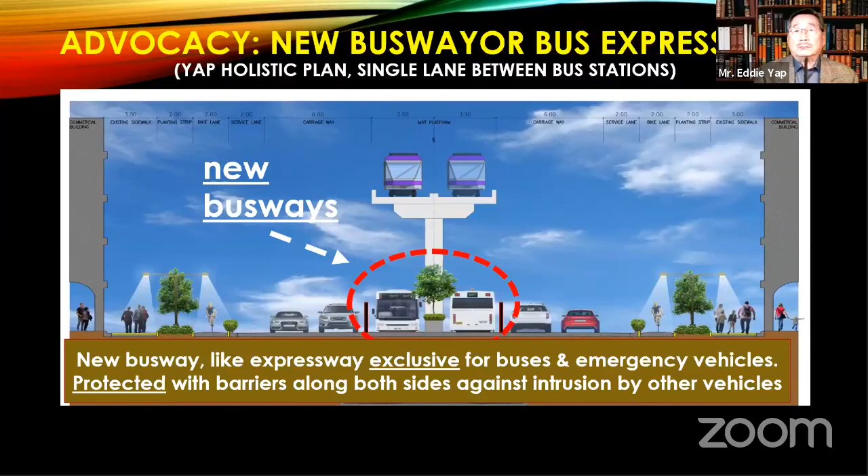Advocacy requires persistent efforts; we do not expect immediate results. On May 10, 2020, I wrote an article, Don't Waste a Crisis, saying that the coming transition period to GCQ with subnormal passenger demand would be a more manageable environment.

That environment ought to be productively used to introduce and pilot test a new bus transportation system. Don't waste a crisis. Following that, Secretary Tugade organized a conference with his road team. Aside from me presenting busway and bus service reform, Attorney Martin Delgra III, LTFRB chairman, presented his comprehensive bus transportation reforms. Present were Secretary Tugade, the road sector team members headed by ASEC Mark Stephen Pastor, and others. After the meeting, which took all of 3 hours, Secretary Tugade said our ideas are aligned, status quo ante is not acceptable, let's do it.

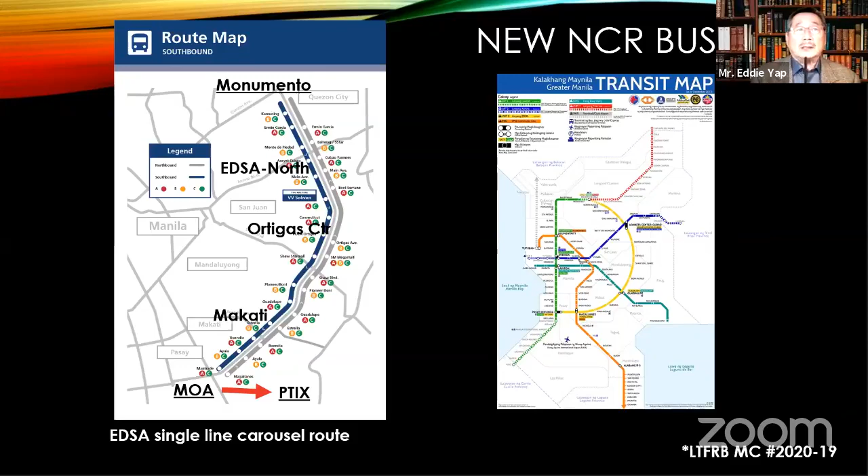Now I would like to share with the MAP, an organization of management practitioners, how these reforms were approached, and the strategies employed that accounted for the quick, inexpensive, and disruption-free implementation. This included complete staff work for bus transport route and service reforms. From the outset, I had personal knowledge that the staff of the DOTR was working on this.

Best practices in bus service employed were the new carousel line and the feeder system. An inclusive process was employed wherein existing bus operators were invited to participate in the new routes. Existing resources were utilized, with the rolling stock of bus operators minimizing capital expenditures. MRT3 facilities were utilized, including the bridges and emergency stairs, as access to the bus station platform.

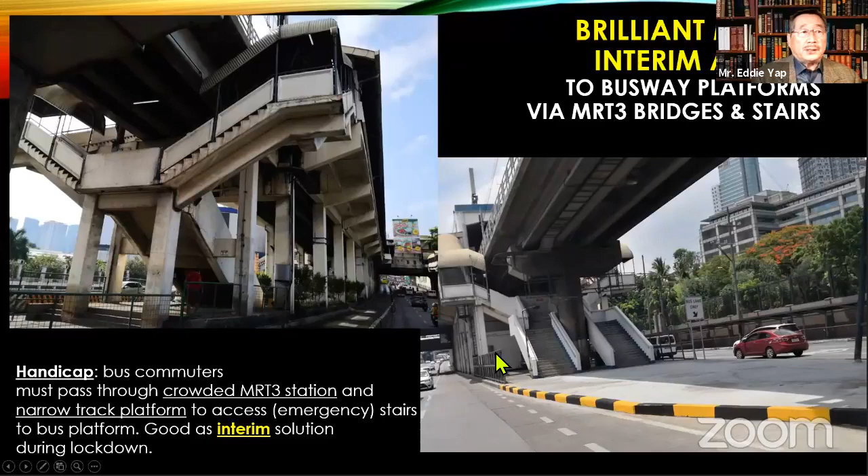It was interagency teamwork that got the busway going in record time, consisting of the DOTR, LTFRB, IAC for the bus management, MMDA, and DPWH. Busway sections were completed in record time: the first section was completed within 2 weeks, from EDSA north to Guadalupe. The second section within 6 months, from Monumento to North EDSA, Guadalupe to Estrella, Makati. This happened despite the lockdown and supply chain disruption. When the new MMDA chairman, Benhur Abalos, took over, he immediately prioritized new overpasses and U-turn slots at the north sector of EDSA to eliminate traffic conflict between buses and other vehicles.

Now let me show you how the busway worked. You can see that commuters are benefiting from faster travel. The busway is like a railroad, like the MRT3 beside it, unaffected by vehicular traffic. This accounts for the efficiency of the busway: it is dedicated and protected against interference. I think you got the idea, so let me continue.

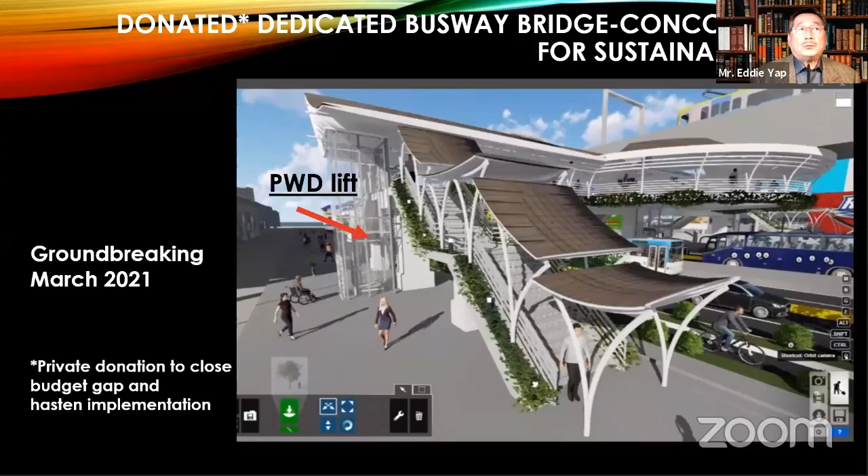Now, because of the budget constraints, we resorted to donations from the private sector to build some of the access bridges with concourses. So this is a visualization of what is being now built along EDSA. The groundbreaking was on March 2021.

Now, when I said authority fragmentation, there are two agencies with diverse mandates, and this presents a catch-22 situation. DOTR is responsible for public transportation and needs additional road lanes for a high-capacity busway and stations to be developed. Currently, it is allotted 1 out of 5 lanes per direction, 2 out of 10 total lanes. MMDA, on the other hand, is responsible for private vehicle traffic management, and it needs road space for private vehicles to flow.

This was before the term of the current chairman. 4 out of 5 lanes were allotted per direction, meaning 8 out of 10 total lanes.

So who should get priority allocation of road space? We believe that the arbiter is the National Transport Policy of NEDA, approved by the President himself in 2017. Section 12.9 says inclusive and people-oriented mobility. Inclusive mobility and accessibility shall be achieved through the prioritization of people mobility over vehicle mobility. In line with global best practices, public transport and shared transport modes will have priority in the use of public assets, including roads of all kinds.

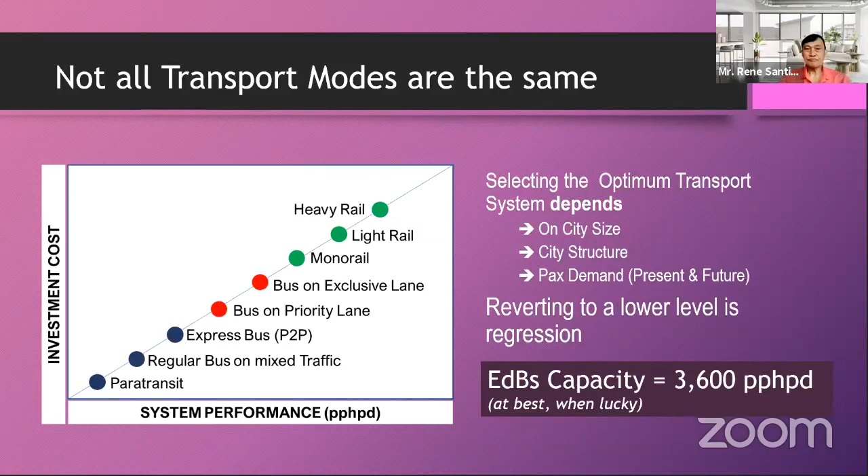What is the evidence now on the ground about actual operations? This is from a paper of Dr. Noriel Tiglao of the National College of Public Administration and Governance of University of the Philippines, published September 2021 and presented at the EASTS Conference in Tokyo. The average headway northbound is 4.1 and the average headway southbound is 2.2. So you have an average of 2 minutes headway, which is equivalent to 30 buses per hour, or 1,800 passengers per hour per direction if it is packed with 60 passengers.

This is corroborated by my own personal dash camera. Whenever my car drives around and passes EDSA, it records the situation on the busway. And I counted 9 buses over 30 minutes, which was about 3.3 minutes.

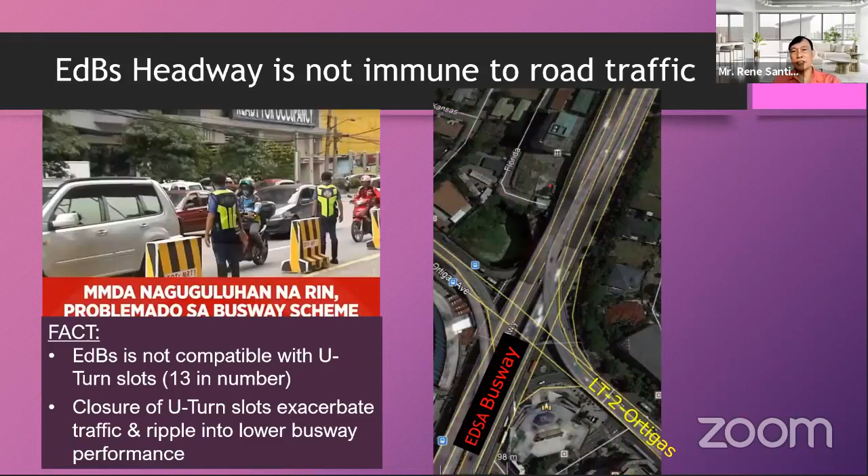The capacity is, of course, constrained by the road traffic, and that is why MMDA got problematic with the busway scheme, because it is being asked to close all 13 U-turn slots on EDSA. The U-turn slots are, of course, incompatible with the busway. But if you close all of them, you will exacerbate traffic, and this will ripple back into the busway being caught in the gridlock. This is an illustration of the situation, for example, on Ortigas, which has 2 elevated left turn ramps going to the west and to the east. Anytime your busway passes there, it will run into conflict with the busway. And you cannot close that intersection, otherwise the entire traffic in Metro Manila will grind to a halt.

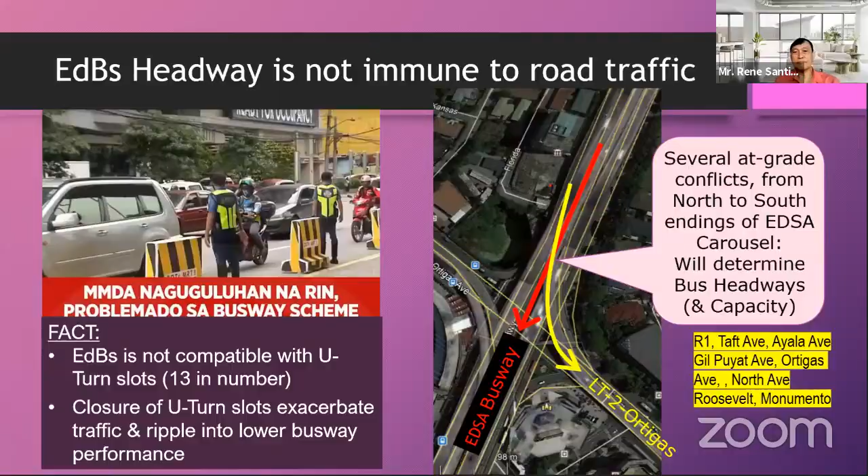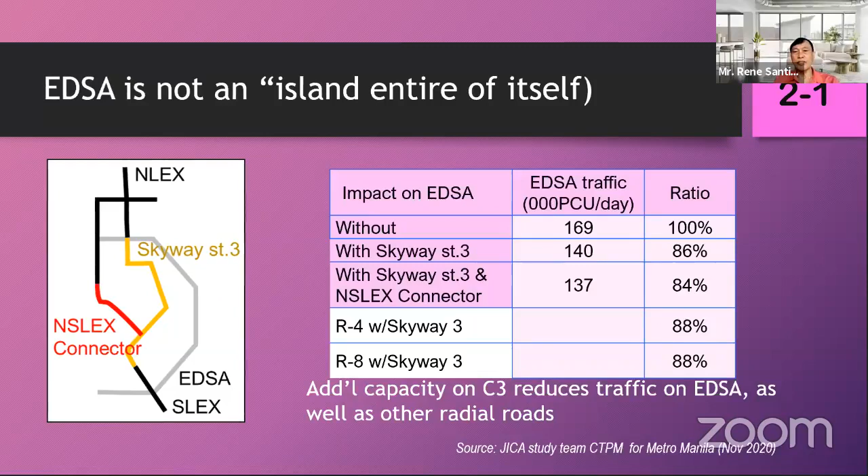The bus network is shown here: the situation before COVID, and then the situation if you fully implement the LTFRB route scheme, which is EDSA trunk-centric.

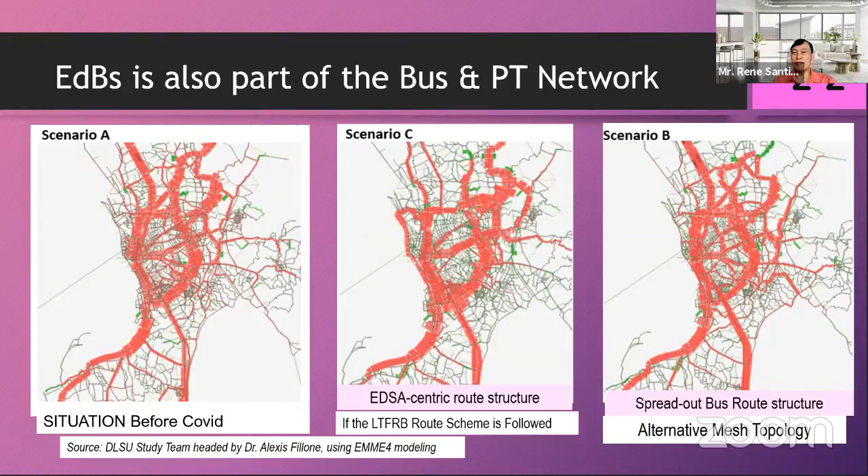This was modeled by Professor Alexis Fillone of De La Salle University using EMME software with grant research funding from the Department of Science and Technology. In fact, he has a better scenario that if you change the route structure, you can further reduce traffic on EDSA by utilizing other routes.

And this is the route structure of the LTFRB approved restructuring. The restructuring, by the way, was already initiated way back in 2015, recognizing that we need to change or redesign the route structure. In this case, from more than 90 routes and 10,000 buses in Metro Manila, LTFRB plans to reduce that to 31 routes and 4,600 buses.

That is, on EDSA, you will bring down the number of buses from 3,500 to 550 buses. The initial deployment of the EDSA busway is only 22.5 kilometers, and the final EDSA carousel is 28.1 kilometers. The EDSA carousel is to end on PITX, not on MOA.

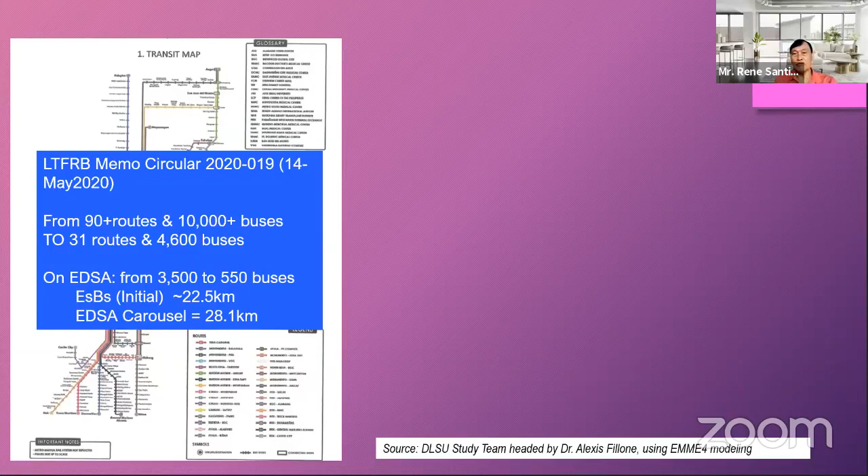This again is the simulation run by the De La Salle team of Dr. Fillone, that initially when they started, allowing only buses on EDSA, that is how the demand would look like. And on the right, as you add more buses into the network, it changes the demand on EDSA.

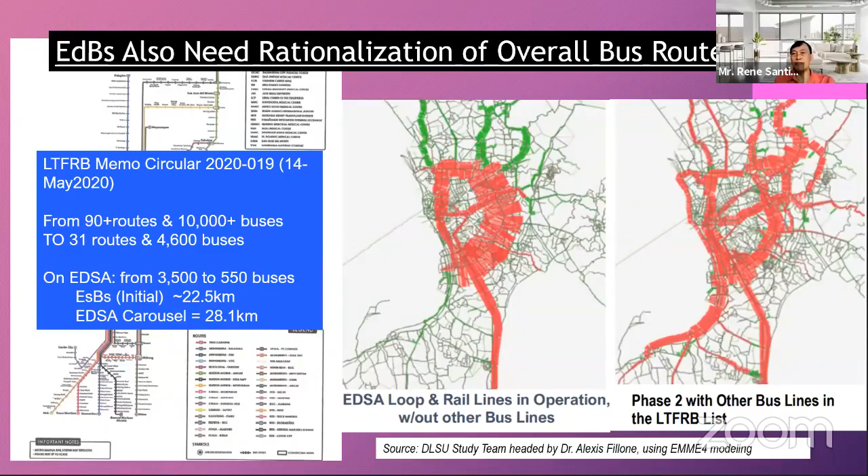Let me go to the third point: sustainability and viability beyond 2020. And let me present already ahead what I'm saying: the current setup will hit several brick walls in a post-pandemic scenario.

That is to answer, can the busway scale up to the BRT envisaged under the BBB program? Under the BBB, there is a central corridor BRT, EDSA BRT, on a study conducted by ITDP, evaluated by ADB in 2015. ADB was supposed to finance the project, but they turned cold feet.

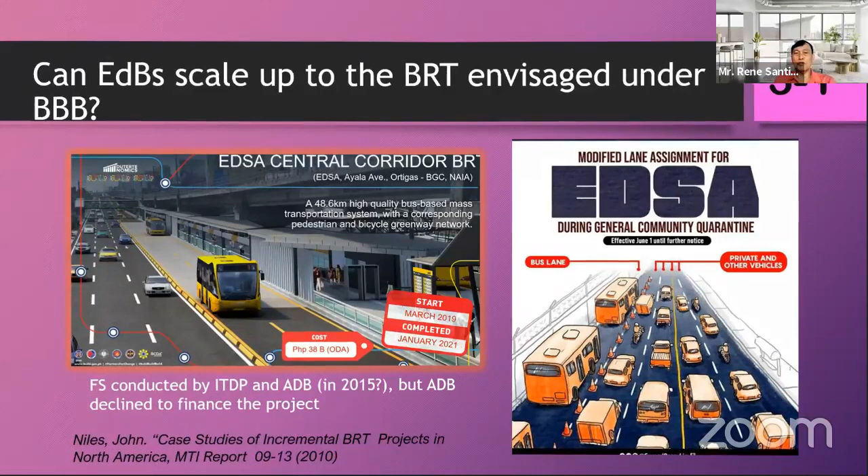This will cost something like 38 billion pesos. That is far from what you have now, the so-called EDSA busway. How do you get the two? To fix the busway and improve it towards a BRT, you need to address 7 factors.

Question: how much will it cost you? If you follow the ITDP, that is $750 million. And for what additional capacity will you get return for $750 million? Maybe 5,400.

But there are insurmountable roadblocks in some of the 7 aspects. On the other hand, your other and cheaper alternative, because you already have MRT3 on EDSA, you just expand it for less than $50 million because you have 48 idle Dalian LRVs procured in 2015. If you can deploy them, you will add an additional 8,900 capacity on EDSA.

As currently constituted, by using the MRT3 stations, the busway has positioned itself in direct competition with MRT3, meaning when you have the same loading and unloading points, since you expand MRT3, there will be no more space for your bus passengers. And why will they go down and up when they are going to the same destination?

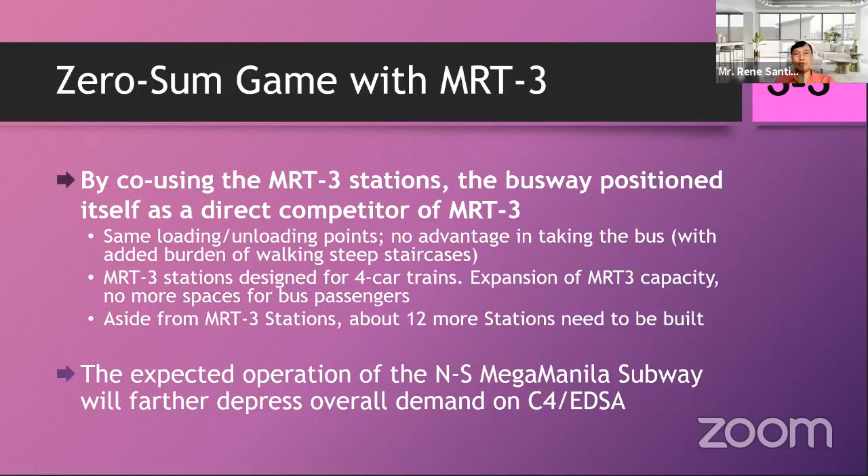The busway has so far survived on the basis of the service contracting scheme, the favorite reform proposal of Dr. Robert Siy It is a lifeline to the busway. It was used to disburse ayuda to drivers under Bayanihan 1 and 2, but it became actually an ayuda more to favored operators, at least if they get paid.

It offered free rides to commuters on the busway. I will say that the service contracting scheme is a bad policy akin to reverse privatization. Government becomes the transit operator for which it has no capacity.

The selection of contractors will be susceptible to corruption, and it blurs the separation of regulator from operator. At the same time, if you push this continuously and expand it, it becomes a financial time bomb that the country can ill afford. Why on Metro Manila alone?

It will require 169 billion pesos a year in 2021 prices, of which 18 billion will be for 5,500 or 4,600 buses. And once you have that under contract, it is too tempting for politicians not to dip their clean fingers on.

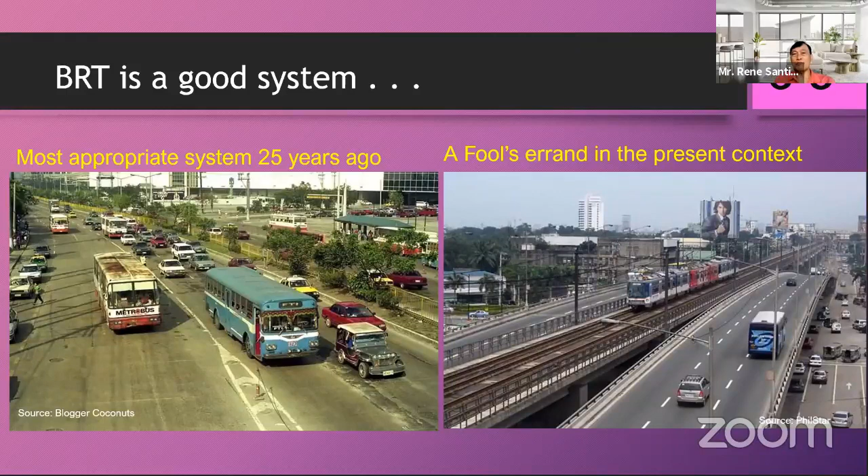As a summary of my third point, BRT is a good system, I agree. It is the most appropriate system 25 years ago when EDSA looked like this. But EDSA looks like this now. So if you continuously throw money into it, it will be a fool's errand under the present condition.

Let me end by saying the good things about the EDSA bus. It has some success factors, some obvious benefits that people now say are good.

The good part of the busway—like in Anderson's fable, I tried very hard to see the majestic robes of the busway so as not to be called a fool. After all, many in MAP, or mostly in MAP, have declared it a success. I've seen how beautiful its robe is.

And this is what I see, and what many of you see: before, the buses were disorderly; now they're confined to one lane, imprisoned by barriers. So if you were to conduct a survey among MAP members, the most likely answer would be 'we love the new EDSA.' It looks orderly. But there are unintended consequences, perhaps.

The LTFRB's restructuring plan reduces the total bus supply in Metro Manila from 10,000 to something like 4,600. On EDSA, from 3,500 to 550. Your busway, at best, when you correct it, can only achieve less than 3,600 passengers per hour per direction. So in effect, you are reducing EDSA from its erstwhile 8,000 plus capacity to about a third.

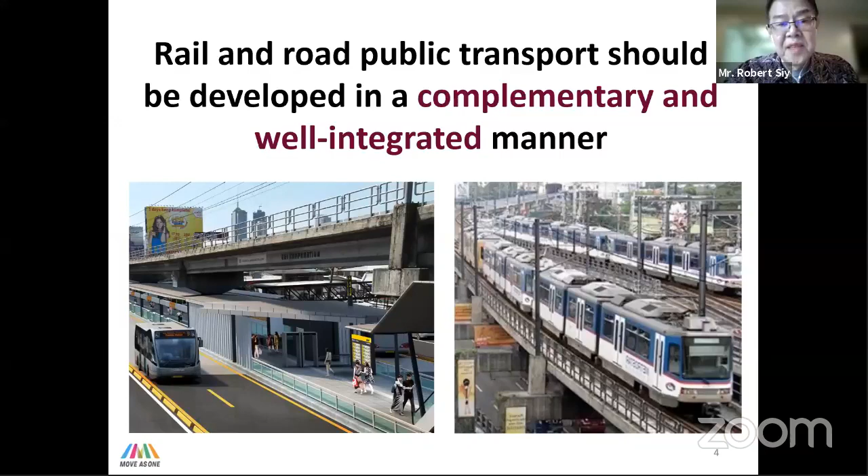And what does this mean? Maybe I can talk a little bit about what this means in terms of improving bus services. Let me go back one step. Let's see if I can... just a second. I think I skipped my one slide. Let me try to go back. Probably at the bottom left there's a left arrow you can click.

I got it. So what I wanted to explain is what makes a high quality bus service. Rene earlier mentioned many of the defects we see in the current EDSA busway. But if we look at the best bus systems in the world, especially the best BRT systems which are also high capacity, we see a fully segregated median busway lane, which also has a spacious passing lane, so buses which don't stop at that station have a chance to pass through without stopping.

You also have clean vehicle technology, and today many new buses are electric. You have safe and universal access to stations, meaning even if you are on a wheelchair you can get access to the station. You have pre-board fare collection, so the fare is already collected when you enter the station, much in the same way as with a train station. And you have platform level boarding, meaning when you are standing on the platform, you can simply take one step and you are inside the bus, so you don't have to climb any stairs to enter.

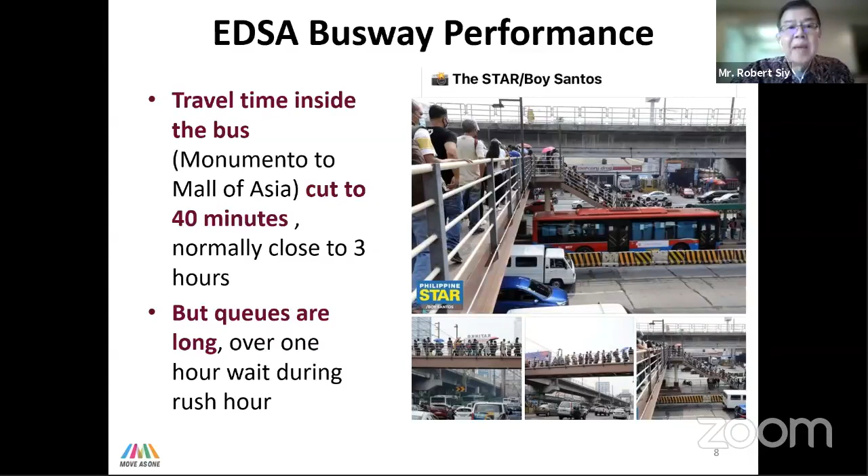So, like Rene was mentioning, previously EDSA carried a lot more people by bus and a lot more people by rail. Pre-pandemic, EDSA was carrying close to 2 million riders daily.

Maybe about 1 to 1.3 million passengers in over 2,000 buses. And on MRT3, there was a time MRT3 was carrying up to 600,000 passengers. And with the upgrade of MRT3, it will be able to achieve even more than that. But we need to introduce a lot more capacity because we can expect physical classes to start. We know also MRT7 will be operational by next year. And when the economy recovers, EDSA will need to carry over 2 million passengers wanting to use public transport.

So what we have today is an EDSA busway that was introduced, as Eddie mentioned, with very little spending. It now needs major investment to increase its capacity. And what we can observe is just adding more buses will not deliver the capacity needed because there are inherent limitations to the existing infrastructure.

So one thing that I think many of us have already observed is if you can only load and unload 2 buses simultaneously at each station, this limits its capacity. And you also get bunching of the buses at the stations.

So what is the secret of high capacity BRT? Like high capacity rail, it also has to do with the size of your platform. How many cars can you load and unload at the same time? And one thing we need to look at is how can we develop the BRT so that you can have a much longer platform and you can load and unload many more buses simultaneously.

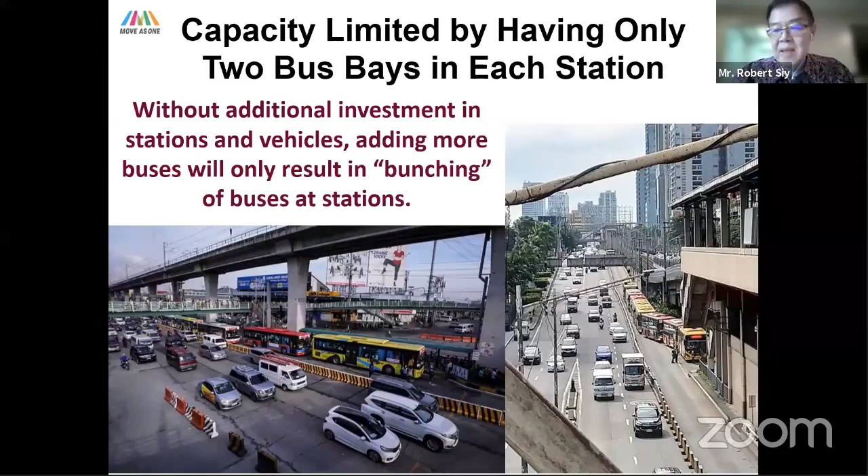Also, today, the bus doors are on the wrong side. And this means that people have to walk around the bus in order to get on and get off. And this adds to what they call the boarding and alighting time. So this adds to the waiting time of each bus at the bus station.

In addition, the fare collection is inside the bus instead of at the station. So this is another reason why sometimes the loading and unloading of a bus is quite slow.

So we also need to improve the station design so that they will be more passenger friendly, more accessible, and provide weather protection. Right now, we don't have that, and that makes it a relatively low quality experience. So this is something that we could do with investment in the infrastructure.

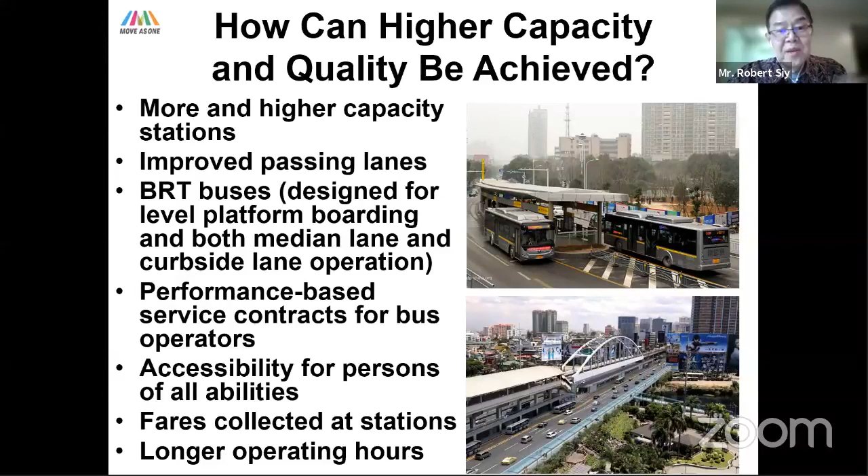There was a plan for doing all this, as Rene already mentioned. There was an approved NEDA board approved project in 2016, approved under the Duterte administration. About 38 billion would have been its cost. And it was also based on

very carefully prepared plans. There was a BRT feasibility study that was prepared, which included also investments in pedestrian and greenway infrastructure. ADB spent more than $1 million in grant support to prepare this particular project. So a lot of work went into this.

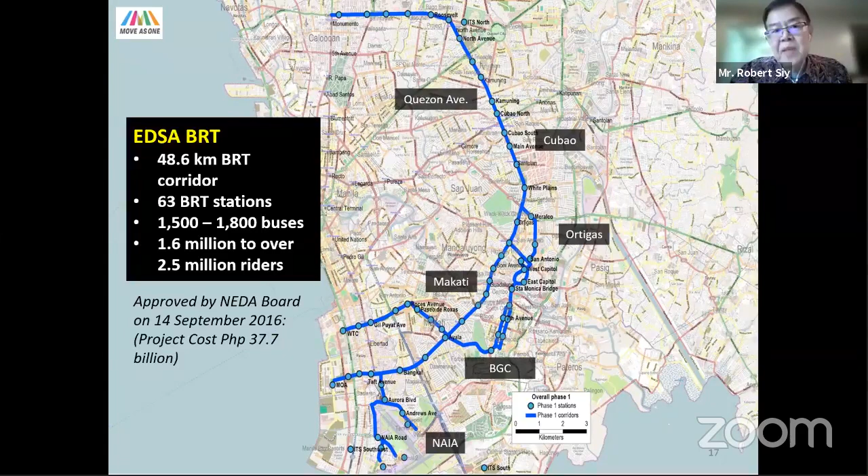And you would have about 1,500 to 1,800 buses operating, delivering a capacity of initially 1.6 million passengers, increasing to about 2.5 million riders per day, using a combination of 12-meter and 18-meter buses.

I just want to explain one aspect about what was planned by the designers of EDSA BRT. And by the way, the same group that planned Guangzhou BRT were the same people involved in planning EDSA BRT.

One aspect is it would go into what we call third generation BRT. The first generation BRT had only a dedicated lane with the bus service going up and down that lane. Second generation BRT involved transferring from one BRT line to another, meaning moving from one bus to another, making a connection.

But what differentiates third generation BRT is what we call direct transfer, meaning you stay on the same bus. You can board a bus on EDSA and use that bus efficiently while it's on a dedicated lane. But then the bus can move out of the dedicated lane and travel on an ordinary road or street or highway to get the passenger closer to the destination.

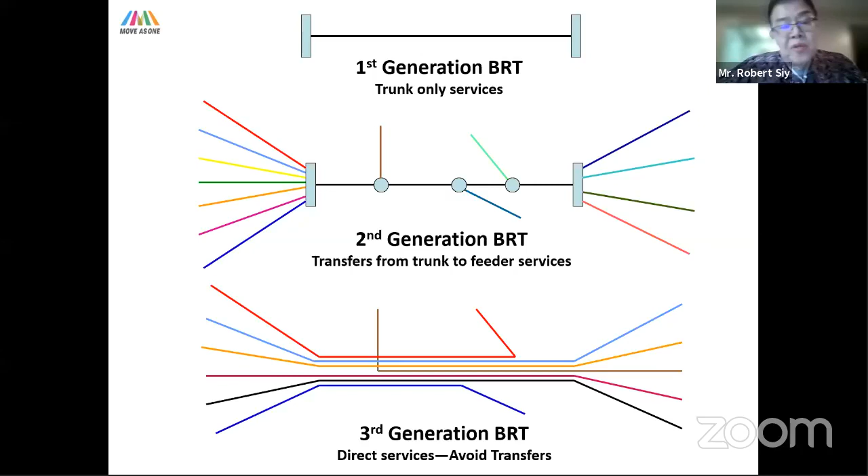So for example, you could have a bus line that could go all the way to Alabang or all the way to Valenzuela using the same bus. That is a BRT bus.

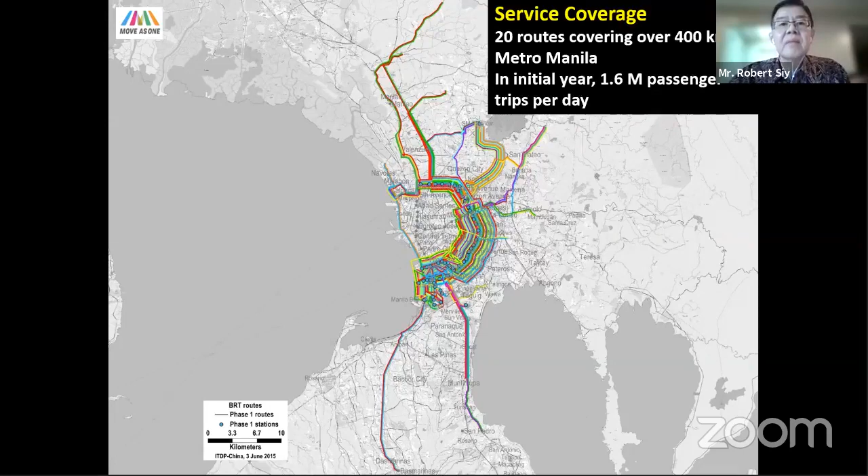So from an initial ridership of 1.6 million, you could reach up to 2.5 million. And combined with MRT3, this could actually deliver a lot more capacity.

Now, why is this important? Because what we can predict is that EDSA will continue to be a very high volume corridor because of the many attractions along EDSA. Demand for travel will continue to grow, and we need a combination of high-capacity MRT3 and high-capacity bus.

And we need to have sufficient capacity so we avoid long queues, we avoid crowding. We need to make public transport as comfortable and convenient as possible so that we can attract even car users to take public transport, as we see in Singapore, London, Tokyo, New York. We want that type of facility in Metro Manila.

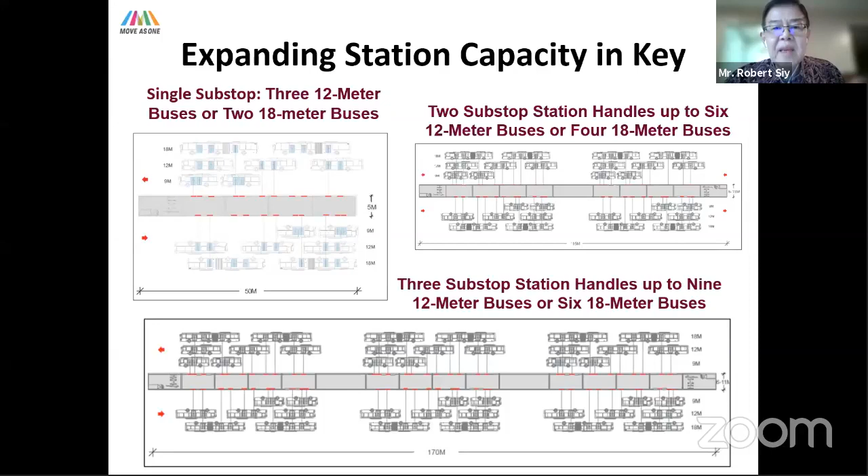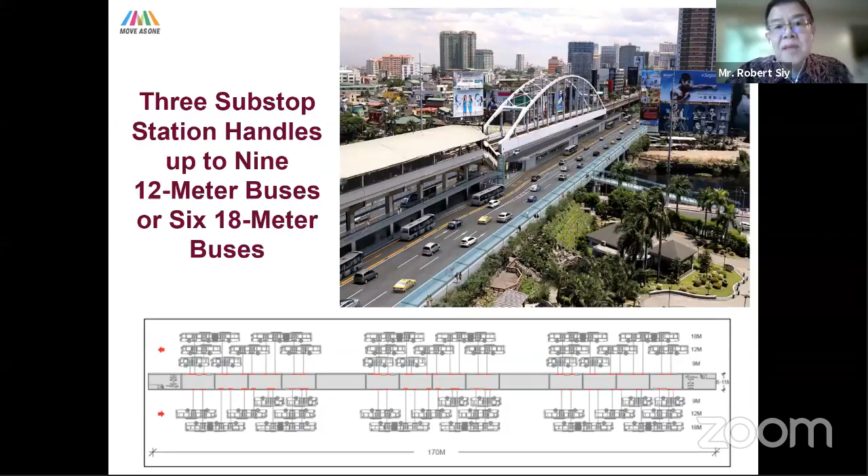Here is an example of the design for the Guadalupe station. We see the application of something called a 3 sub-stop station that can handle 9 12-meter buses or 6 18-meter buses. This is the secret of high capacity. You can accommodate almost the same capacity as a high capacity train line.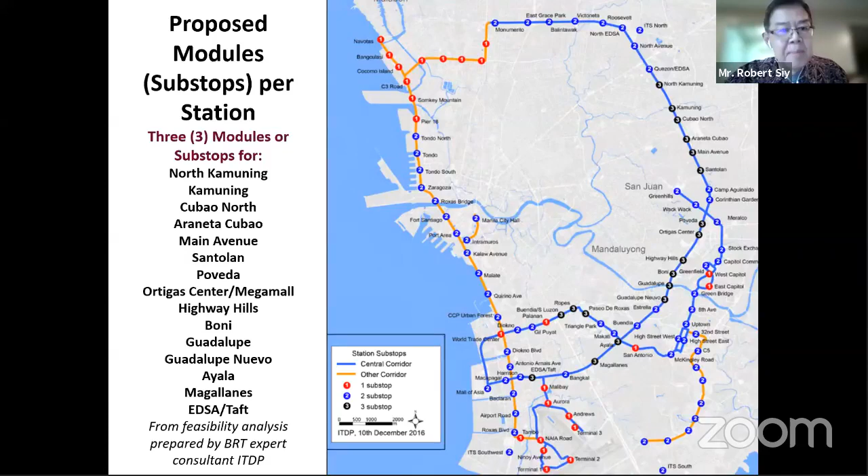This map gives you a picture of where we can make high capacity stations. On the left column, I list here the many stations which can have the highest capacity station, as we showed for Guadalupe. There are 15 stations here where you can accommodate a very large volume of passengers at the same time. I just want to show you quickly what some of these stations would look like.

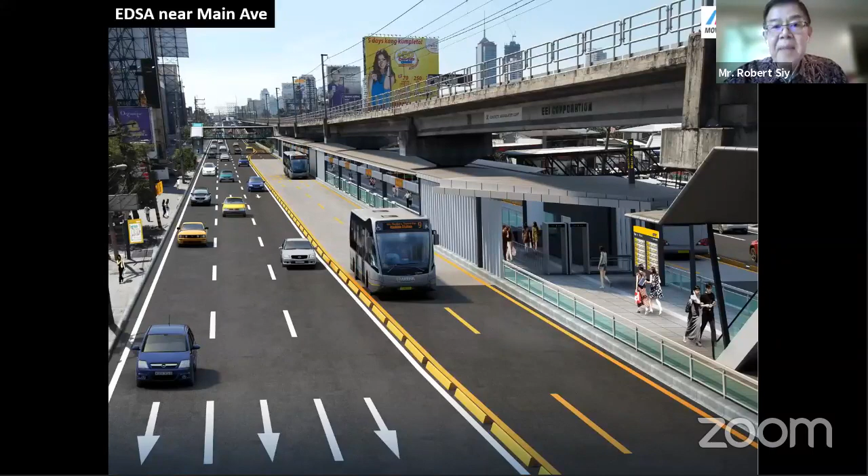And why was it then abandoned? Why did the government lose confidence? Basically, it was because some transport experts advised, number one, there won't be enough demand, especially after subway and MRT are built and improved. Number two, there was the view it wasn't going to be technically feasible because of many difficult intersections.

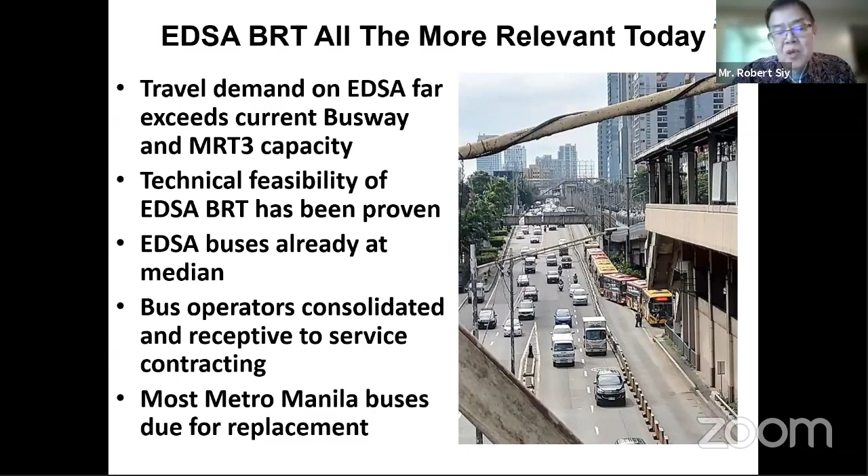So, what would EDSA BRT enable? What would it deliver? It would enable buses and the bus system to be higher capacity. It would deliver accessibility for persons with disability. You can have fare collection at the station and much better weather protection.

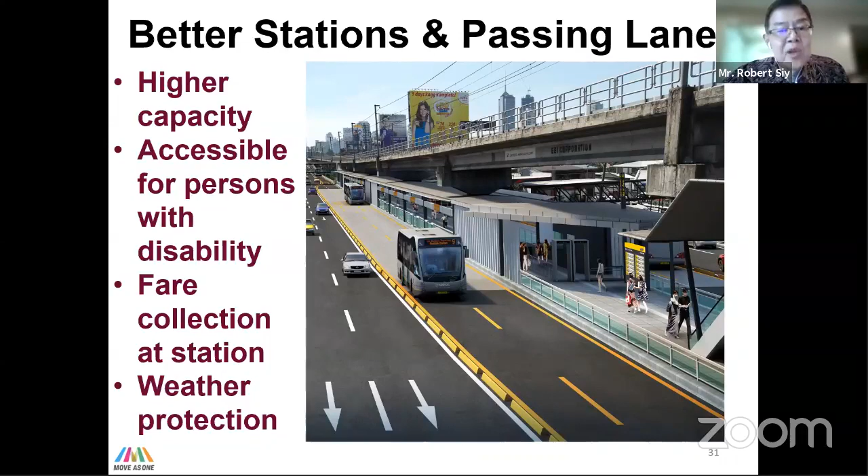We would be able to introduce BRT buses with doors on both sides. Already, some of these exist. We could introduce even hybrid or fully electric buses which have close to zero emission and much lower operating costs. So at a time where we are facing a lot of volatility in fuel prices, moving to hybrid or electric will help the public transport industry to also manage that risk.

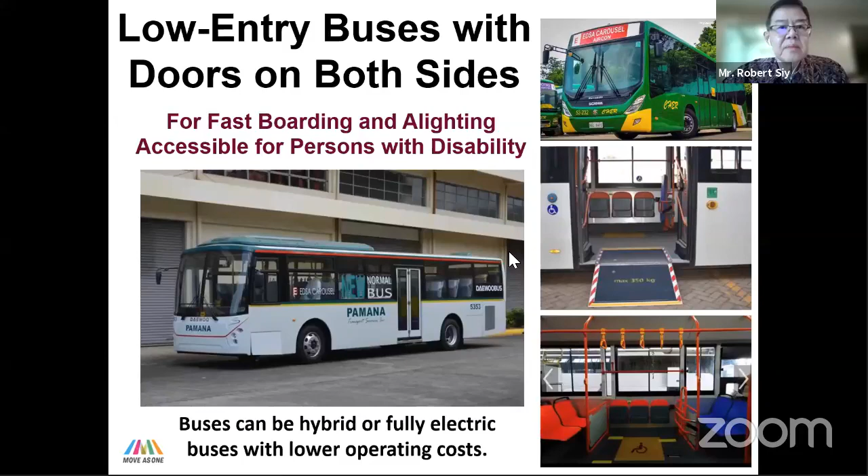Also, long-term service contracts would be the way to go. And this is how we introduce a better business model for our bus operators and incentivize them to deliver high quality. We would have contracts that are performance-oriented, and I think Bong will talk a little bit about that. You would enable bus operators to get long-term financing from commercial and government banks, and we can specify uniform vehicle specifications so the buses can interoperate across many different BRT systems.

One last point, which is about whether it is a good or bad thing for rail and bus to overlap. And one thing I would argue is if our objective is to have the best convenience for our commuters, we need to give them the best convenience possible. And so, for high volume corridors, it makes sense to have both bus and rail operating on the same corridor. And we can see this.

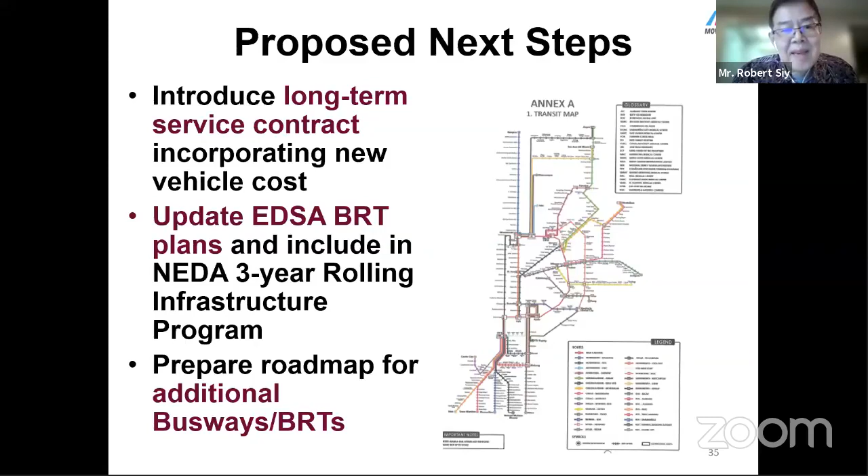And then we should have a roadmap for additional busways and BRTs, because to make public transport attractive, we need to work on both rail and bus and make sure they are complementary and well integrated. So we shouldn't see bus and rail as competing. We need to work on making them fully complementary. So that should be our aspiration for the future.

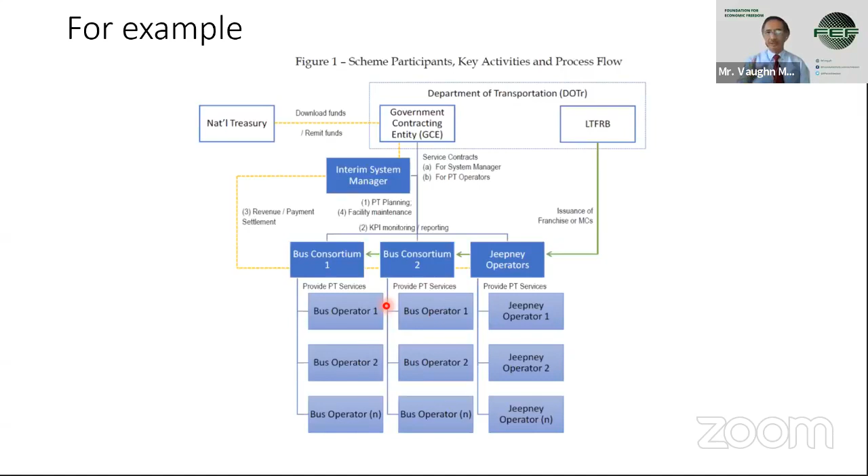Now, if you are able to do all of that in a vertically integrated way, the transactions across institutions can be resolved by interim system manager, which is a management committee that will deliver on the outputs and the outcomes and the performance required in a PPP program.

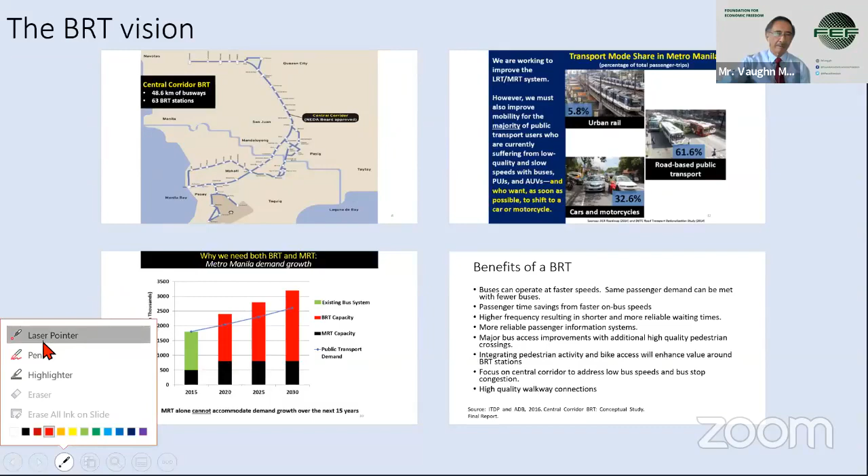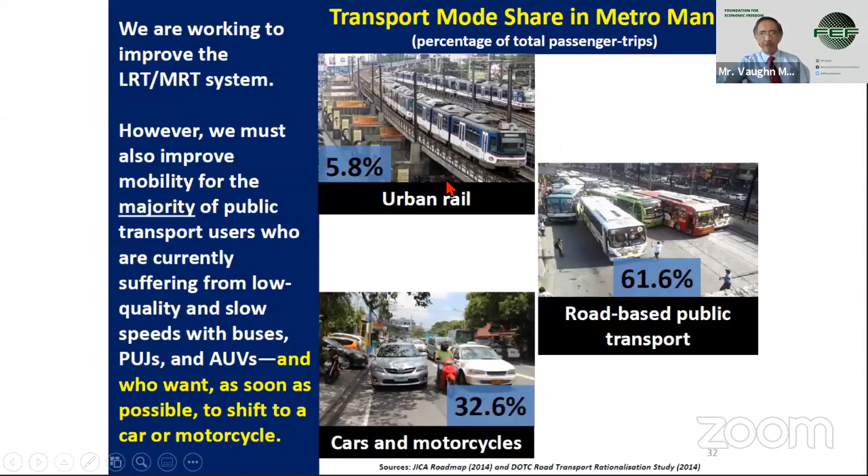Now, going back to the BRT vision, Robbie has shown you these charts already. So you have the central corridor that Robbie shown, and I borrowed this material from some of the materials Robbie shared. So far, 61% road-based public transport, 5.8% urban rail, and 32.6% cars and motorcycles.

And then picking up from the benefits of a BRT, again focusing on the outcomes and outputs, not on the inputs. The proposition is that with the BRT, buses can operate at faster speeds. Same passenger demand can be met with fewer buses. Of course, with fewer buses, then you have to find out who has to give up. Passenger time savings from faster bus speeds, higher frequency resulting in shorter and more reliable waiting times for the passengers.

And then you can have more reliable passenger information systems. You can have major bus access improvements with additional quality pedestrian crossings, integrating pedestrian with bike access. And then the idea is to maybe focus on the central corridor first to address low bus speeds, bus stops, and high walkway connections.

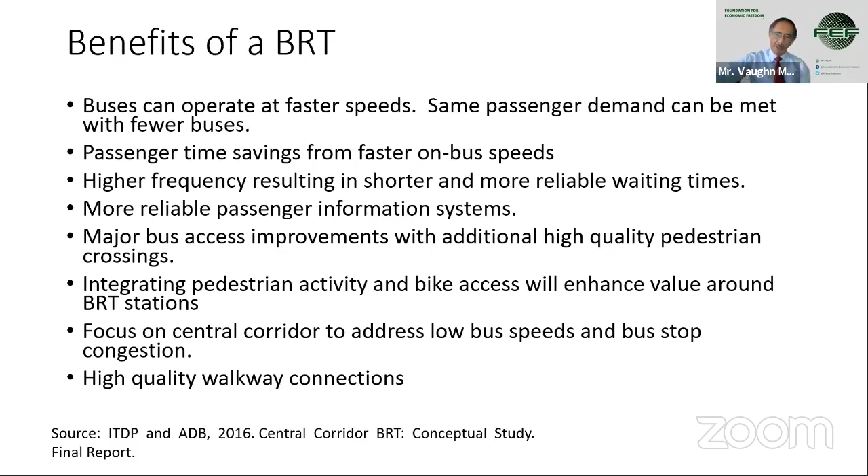So my personal views on why the bus: because the bus is flexible as opposed to the rigid infrastructure you have in rail systems. You have upward and downward scalability. You can even say, in a BRT, you can convoy two buses, so you can have articulated buses that can work like a small train.

It's got intermediate energy efficiency as a people mover. It's more efficient than jeepneys and cars, but not as energy efficient as urban rail transport. So it's intermediate. Lower capex requirements - you can use the existing road network, but you have to reallocate and relocate and design bus stops for safety and efficiency.

And I think Robbie mentioned this, that passengers prefer to reduce the number of transfers. And so with origin-destinations not on EDSA, they would really prefer to be in the same bus to get to their destination. So the bus can be traveling over a mixed traffic part, go through the busway exclusive access, and then move on to a mixed traffic area to their final destination.

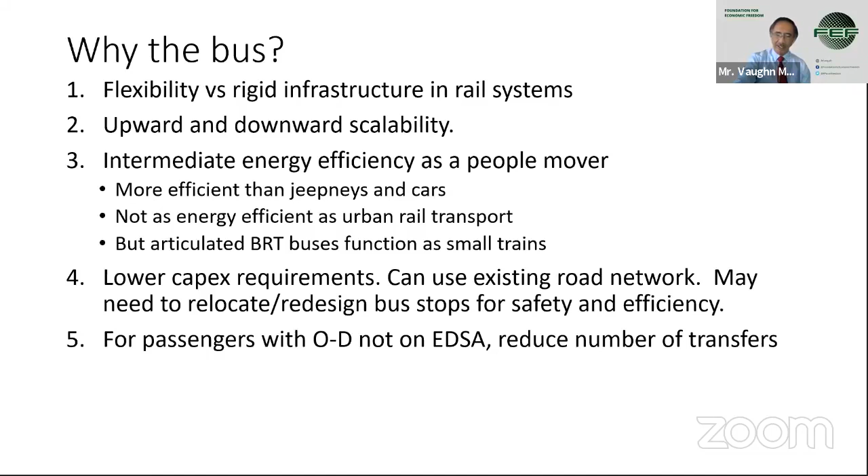And then suddenly you have a limited access busway at the EDSA median that was created last year. So I'm not talking about the grand plans for the BRT or MRT. I just want to talk about what we have at hand, how we need to move forward.

In terms of contracting bus operators through PPP, this is PPP. This is not rocket science. It's standard. It's been done in many countries, like India, where you can have PPP contracts with the bus operators, and maybe the way to do that would be to contract out in terms of bus routes.

I saw one material, I don't exactly know where it was, but you have identified bus routes here. So for every BRT route here, you can have bidding out the PPP contract for them on a solicited proposals basis, using service contracting as the way for the revenue flows.

But you can have express routes. You can also bid out what practically would be local routes, and the bus operators will have to bid for the PPP for each specific route, and there will be minimum performance standards and specifications for those routes. It's not rocket science.

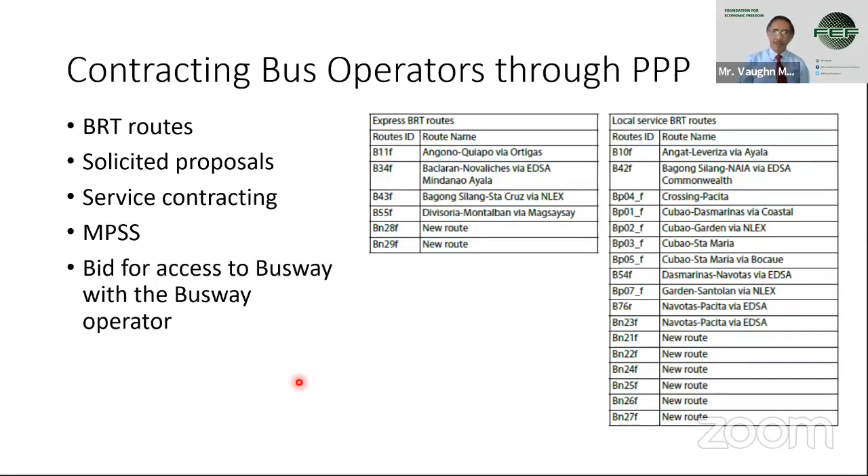It's been done in many countries - instead of just contracting them out as counterparties to a service contract, you get to contract them as PPPs with the performance standards, KPIs, and proper risk sharing, and also proper monitoring of outcomes.

On the BRT itself, picking up from what Robbie and Rene raised, you have to talk about repurposed bus stops. You may have to expand platforms to handle bigger volumes, build out the busway with more stops, realignments, and intersections, and manage the throughput, number of buses per day depending on time of day, headway, and convoys. One question: if you're trying to construct or redesign new bus stops, how can you do that without interrupting the operation of the busway?

You could probably do it on a staggered, optimized sequencing, maybe choose some sites which are not used as stops right now and build in those areas. You may have to adopt quick construction methods, maybe work at night, so you don't interrupt the operation of the busway while reconstructing the expanded platforms and repurposing the traffic intersections.

These are the tasks of the interim system manager, which should be very complicated: PT planning, KPI monitoring, reporting, revenue payment settlements, facility maintenance.

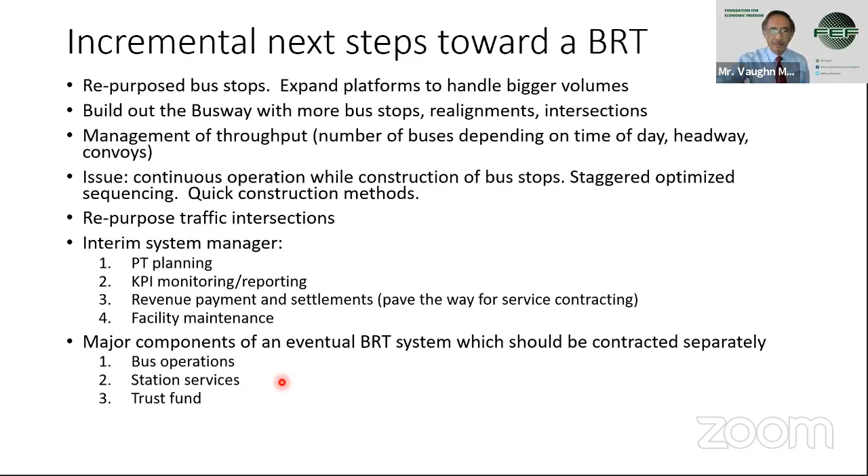Just some quick notes on service contracting, the way it's explained and done in other countries: the government collects the fares, then the private bus operators are paid from the fares according to the number of kilometers traveled by each bus. This delinks the revenue model from the number of passengers. Right now, it's a boundary system.

So drivers drive in a market-driven way because they maximize the number of passengers. They compete with each other for a passenger waiting on the sidewalk to be able to get him, and that doesn't work. This is where there's market failure—market-driven driving is not a public good.

But if you get paid by the number of kilometers, you take out that incentive. You still have penalties and incentives, using GPS to track the vehicle and the number of routes, with 5 to 7 year long-term contracts.

To me, the most difficult thing here is that the government collects the fares. Will the private bus operators agree for the fares to be collected by the government?

We're living in a world of AI and online payment systems. We order our lunch from KFC, pay with GCash, and contract out Grab delivery to pick up the lunch. Waze or Grab combines the technology of GPS, mobile telephone, and online banking for them to work.

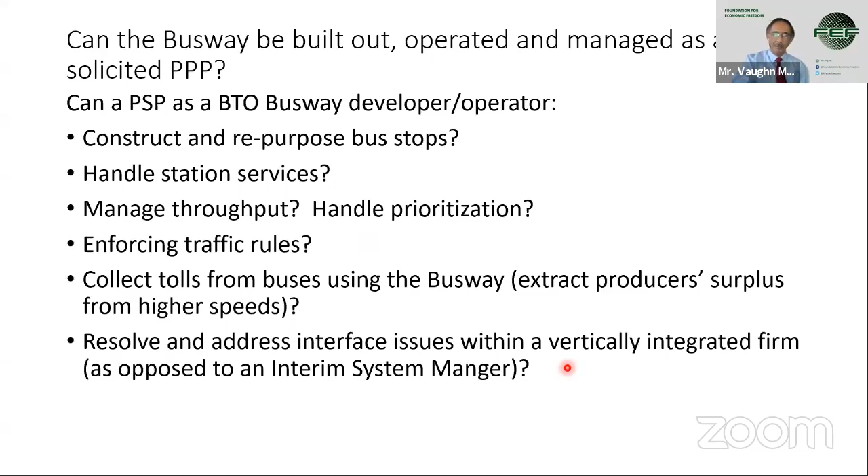Finally, there are still some issues I'm not clear about. For example, can there be a stable demarcation of the busway? This can be a legal issue—if you move the barrier a bit, maybe the BTO contract will be affected, and the lawyers can have a problem with that.

So during the concession period, in the transition towards a full BRT, if it becomes a toll operation, will it encompass the STOA with PNCC? Who will be the counterpart implementing agency? You can start contracting out the BRT PPPs, but you can't start that because there's no BRT roadway yet.

So you have to think of converting the busway into a tollway—busway as tollway. Make sure fares are collected electronically so there's no bunching up at the entrance, and vehicles just pass through. In terms of prioritizing who gets to use it, that can also be managed through some sequencing, like merit order dispatching.